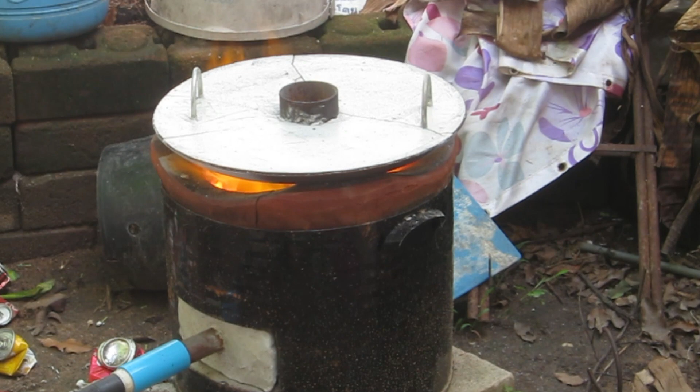Back to part 7 of my milling machine build.

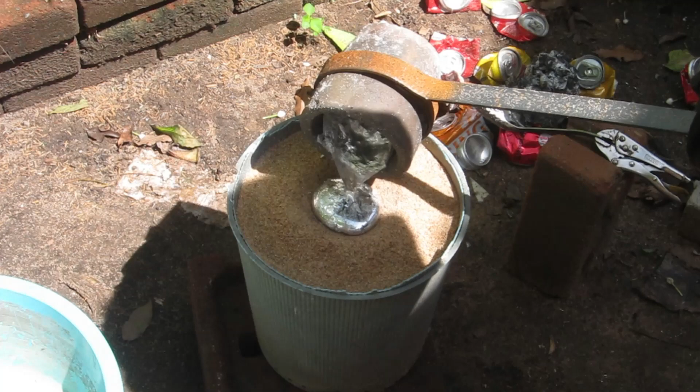Alrighty, so I've just dumped the bucket out into the basin. Now it's had time to cool, so it's kind of the moment of truth. We'll see what I get. Oi, kind of looks alright. Oh, I think we have a winner.

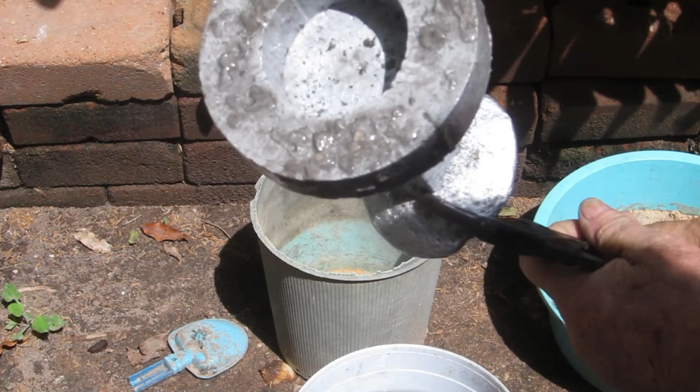Time to cool it down. Still pretty damn hot. Can you see that? I don't think you can see that. We have a winner. You little ripper.

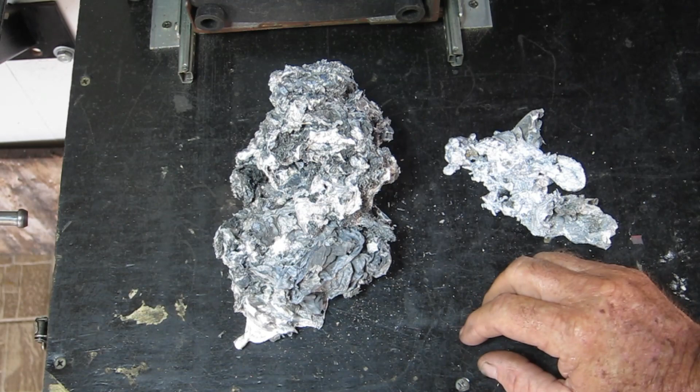Thought I'd show you this stuff. This is the dross, the crap that comes out of metal when you melt it. This, plus a bit more still lying on the ground at the back in little pieces, is what I got from all the aluminium cans and the swarf, and I only got half a crucible worth of metal.

This is what I got from melting the good stuff, plus a bit of that rubbish from this one, and I got a full crucible. Huge difference. So take old Foundryman's word for it and don't use aluminium cans and swarf, because it's just bloody rubbish.

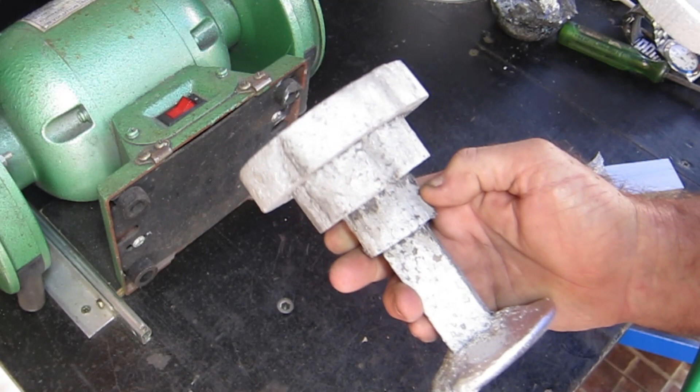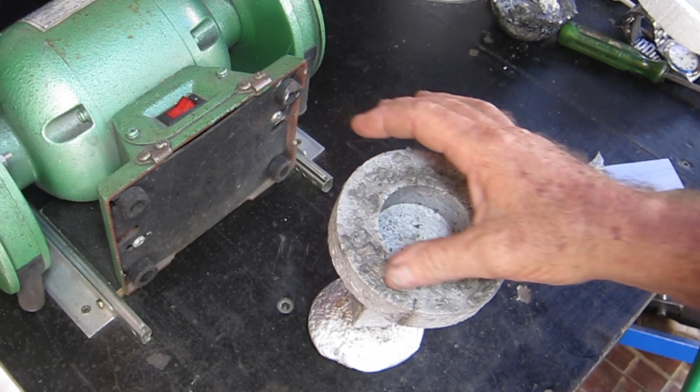Well, there she is, viewers. It's truly astounding how much detail you get in these things. You can see all the little pores and the little beads in the foam and all the rest of it. This stuff on the bottom here had a lot of sort of holes in it, so I went round and I filled it up with some hot glue. So that seems to have worked.

I've got another idea. Some of that pre-mixed polyfiller stuff I think would burn away, so next time I think I'll buy a pack of that and fill it, give it a light sanding, which should get rid of all that rubbish.

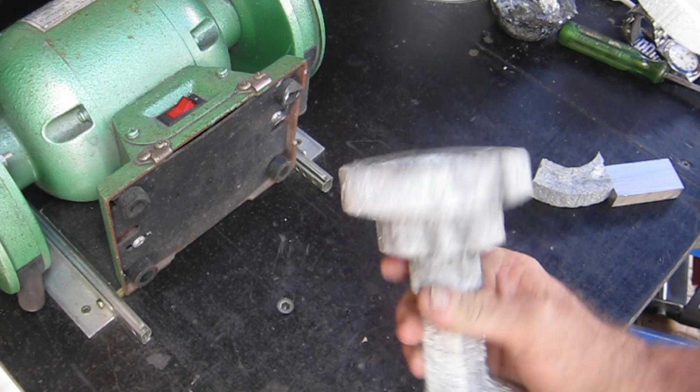This is a piece of the first one, and it didn't like being cut by the saw. You can see the stuff on here, so I don't think it would have machined very well, and I was a bit loath to actually add this into the mix, but most of the material that's gone into this is stuff I've either machined or was cast before, like that slave cylinder from the Triton. Anyway, I'll cut this sprue off, we'll get it in the lathe and machine it up.

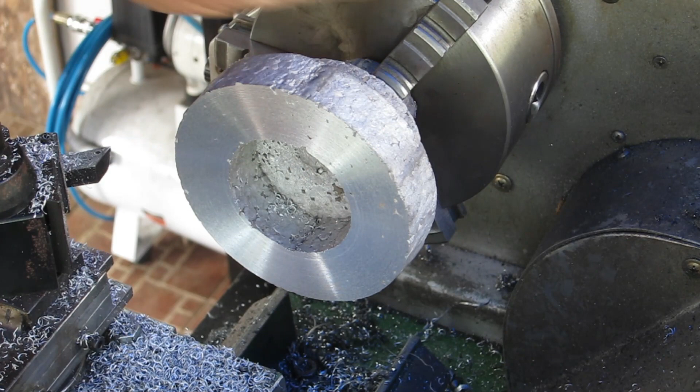Well, I've taken a few skims off the face here, just so that when I turn it around and put it back in, it'll have something fairly flat to sit up against, because it wobbles a fair bit this way. So I'll get that out of there, swap the jaws around, turn it around and machine the front end of it first, and we'll come back to the back end after we're all done there.

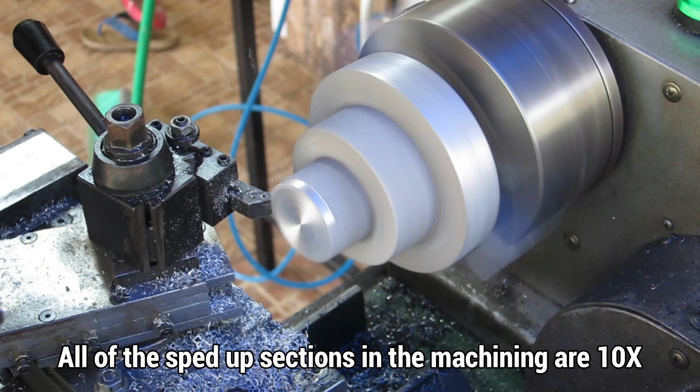Well, as per usual, I have no drawings, no plans, so I'll just be winging it and wandering over to the mill and taking measurements as I go with this. So far this stuff machines pretty well, still got a couple of little inclusions in there, but I might have to machine a whole lot more off that face yet. Well, I've got a long way to go on this, so I'll bring you back later.

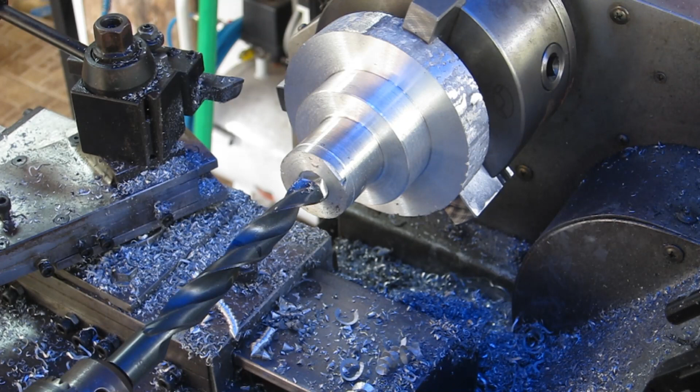Alrighty, so I've machined it up to what I think I want. There's a few inclusions I can't get out of it, I don't want to go any further with it. There's a couple in this face here, but I can't make this any smaller, I'll run out of thickness for some grub screws to clamp it with. So now I'll drill it out, and then I'll have to bore it. This line here has to be parted off when I'm done, but I'll drill it first and then part it off.

I've run out of WD-40. I should have gone down the road and got some, but I'll just use some oil instead.

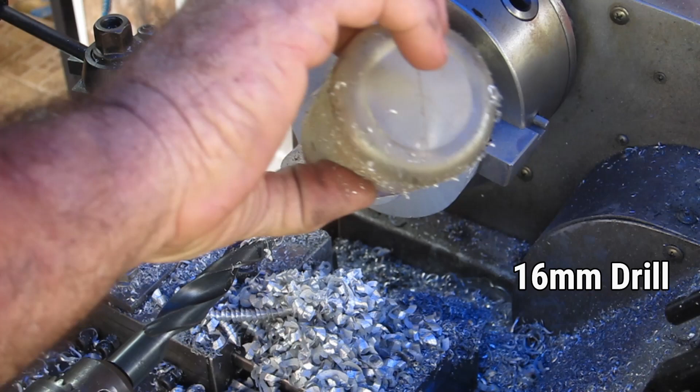Alright, so I need to bore that to 19mm now, but I'll part this bit off the front first. Save myself some boring, I'll only bore down to about here, and then in the back of this I'll use the 19mm drill. It won't matter if it cuts a bit oversized. Alrighty, I'll get on with that. One end up oversized.

That's 18.97, and I don't know that I want to make another pass up there. I might just try and polish that out with a bit of sandpaper.

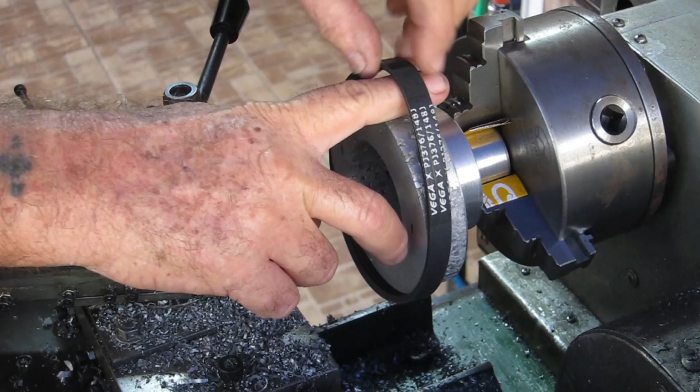Alrighty, so next cab off the rank. I've got to turn the OD of this down to something that's about right, because I think I've underestimated the belt length. It might be a bit short, because if at that point there I'm not going to get a 19mm pulley in there. At the moment that's 105mm. I'm hoping that down around 95. I wanted to do it at 100, but I'm hoping at 95 I'll get enough room for the other belt, the other pulley over the side here.

And I've also got to bore the inside out to just a bit over 75, maybe 78, something like that, so it's got clearance over the top of the bearing housing up on the top of the milling head. So we'll get on with that.

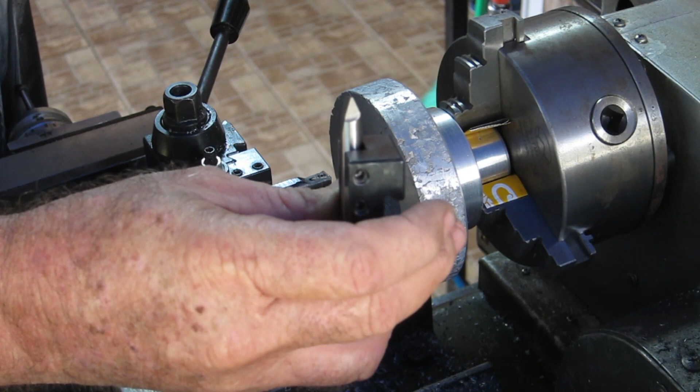Once I've turned that down, I'm going to have to put the grooves in it, and I've ground this tool up. It's a piece of 5/16 round. I found all the dimensions required online to mark this out, so we'll get it all turned down and then I'll mark it out, and we'll attempt to cut some grooves in it with this.

Something else that I didn't mention, I also have to bore up inside this part here, bore that out to about 50mm to allow for that clamping section, the shaft clamp up on the top as well. But all this will take quite a while, I'll bring you back a little later.

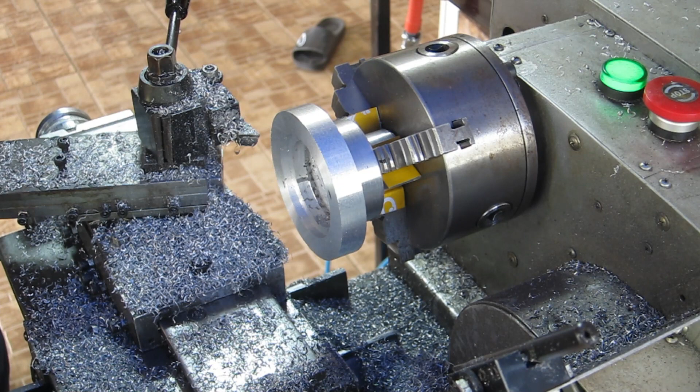Righty, quick progress report. I was boring away in the centre here and I kept thinking, why does it look so deep? And it suddenly occurred to me I had to knock 10mm off the face of this. So I abandoned that. I've come out and I've taken 10mm off the face, and I've reduced this now to 95mm, and this belt length should be perfect now, so looks like I got that right.

Anyway, I'll get on, keep machining this up. I'll get back to you.

Well, that's it for the inside of all of that. I've still got a few inclusions here, but I'm a little worried that this area just here has gotten a little thin. I don't really want to take any more out of it because I don't want to break it off. But there's plenty of meat up here where these inclusions are, and you know, once it's on the mill you won't get to see it anyway.

So that's that for the inside, and it hasn't quite worked out the way I had it in my head. I might end up having to machine a bit off the top there where it just sits over the shaft. But anyway, that doesn't matter, I'll do that later.

So now I've got to mark all the outside up here and machine those grooves in it. But I've got to head into town for a little while, so I'll do that when I get back after lunch.

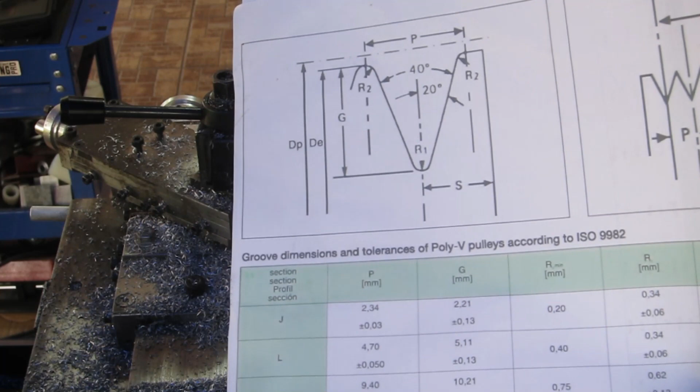Alrighty, so these are the drawings I found online, and the specs are just astounding. This is a type J, so the width of these grooves is only 2.34 millimeters. It's an odd sort of size, and the depth is 2.21, so I don't know whether these equate to an imperial size or not, but they're weird.

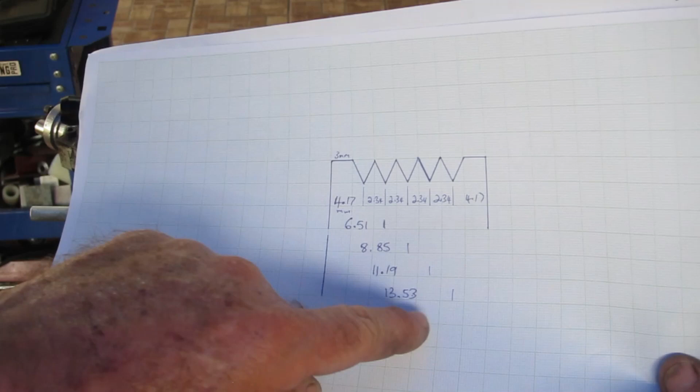Now, there's going to be absolutely nothing scientific about the way I do this, because I have no micrometer dial on my Z-axis. So I've worked out I want to have a 3mm flat out on the edge here. So I've worked out the bottom point of each of the 5 V's and worked out what the measurement will be from the edge in, and I'll just use my digital vernier. I do have a scribe, a proper scriber, but working out these odd numbers would be a nightmare. Much easier to do it with the vernier. So that's what I'm going to do.

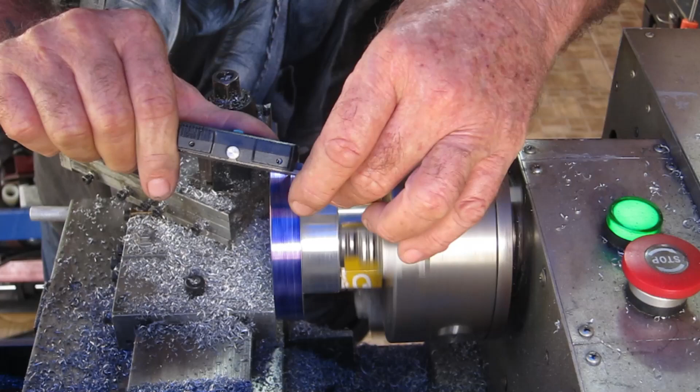Alrighty, so there are my marks. So I'll set the tool up now and we'll see how we go.

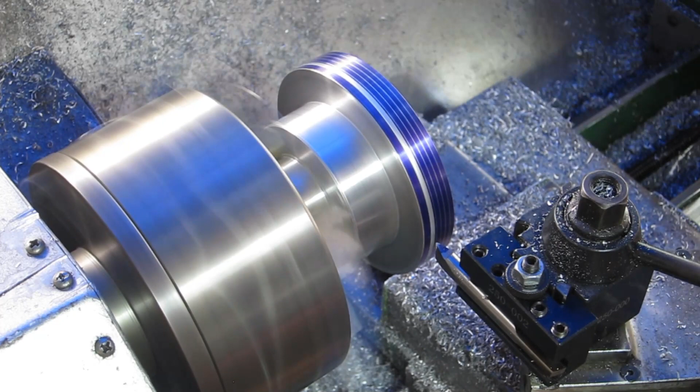See what it looks like. Oh, surprisingly, it looks pretty bloody good.

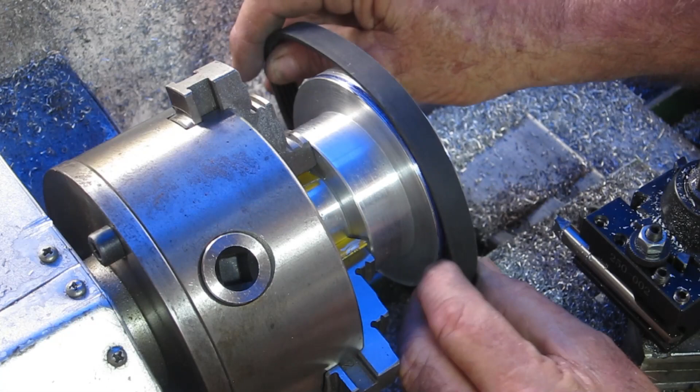Yeah, that'll grip. You beauty. Looks like we might have had a win.

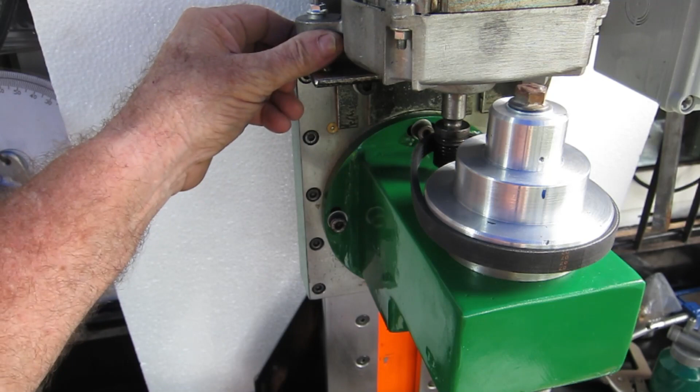Well, I don't really know why I was worried about the belt not being long enough. This is about where I want the motor to lock up, about there, and it's loose as buggery. So I'll have to set up an idler bearing in here. But that's not a bad thing, because it'll make the belt wrap around the pulleys more and make them drive more positively. So that's not a bad thing.

And I can just set that fixed. I don't need to make that adjustable because I have adjustment up in here. So I'll just figure out just where to drill and set that bolt in there, put a bolt through it and just bolt it straight to this.

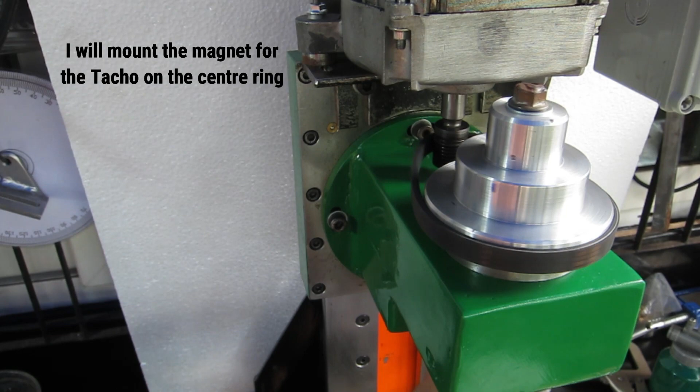And on another note, it really needs about 7mm taken off the top of this, but I put a washer under there, and when I was tightening it up I felt it give a little bit, and all that play I had in here is now gone. So I've managed to pull it out with that.

So when I pull all this off again, I'll get in there and nip that little clamp ring right up tight and know that it's pretty much where it needs to be. And I don't need those 2 adjusting screws on top, because I can use that to adjust it up.

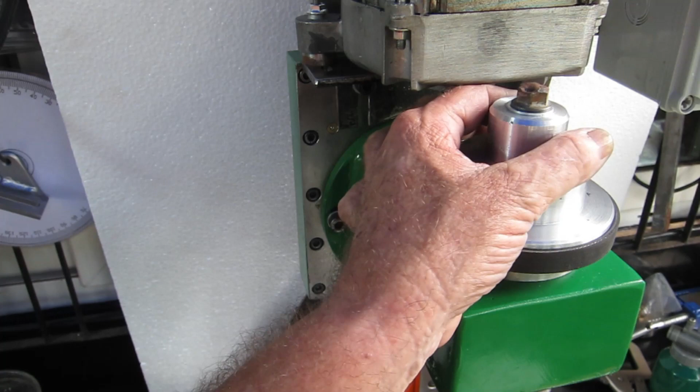And you'll see 3 centre punch marks here. I'm going to drill that and put 3 grub screws in around here, so that'll lock that onto the shaft nice and tight. So when I lock this down, hopefully this won't have any effect on the bearings. So winner winner, chicken dinner.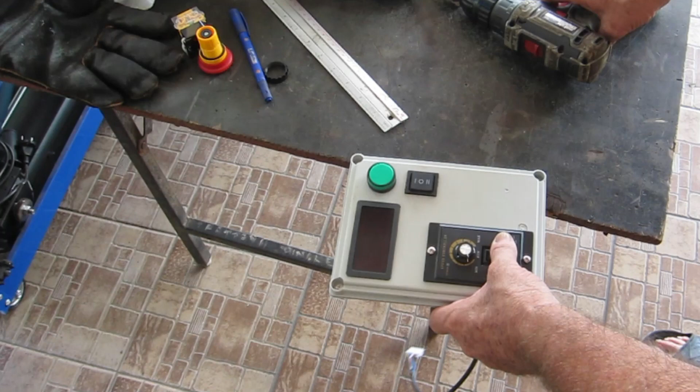Alrighty, so while you guys weren't looking, I went out and I bought some electrical cabinet here, and I've been gathering everything to do this for a while, and it's time to get it all fitted up.

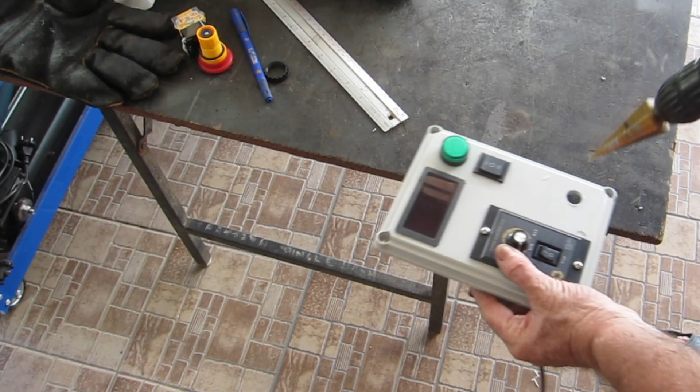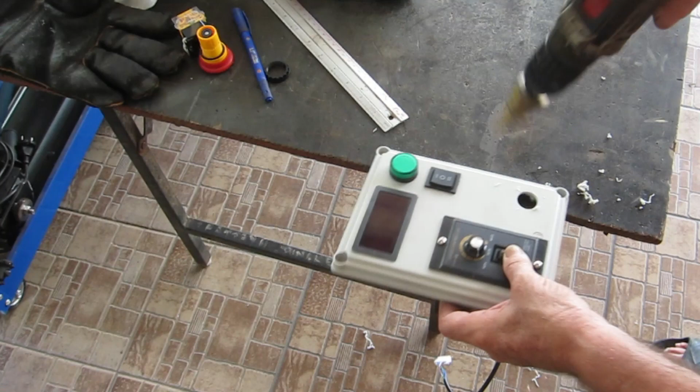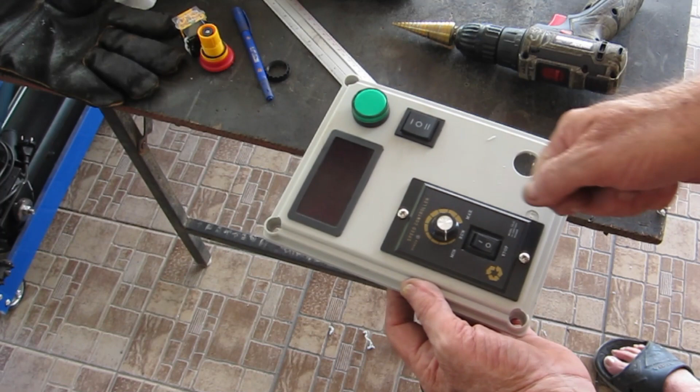You know, these things are brilliant, they have no trouble chewing through plastic. This was a weird one here. When I was cutting these out, I just drilled some holes and used the jigsaw. The jigsaw was melting it, so as I was cutting it, it was re-gluing itself back together. What a pain in the ass. Anyway, I'll get this one fitted up in here. Wait, next one up.

That's going to fit in there. Beautiful. I think I'll get the crap cleaned off the back. Anyway, I'll get myself all set up and then I'll come back.

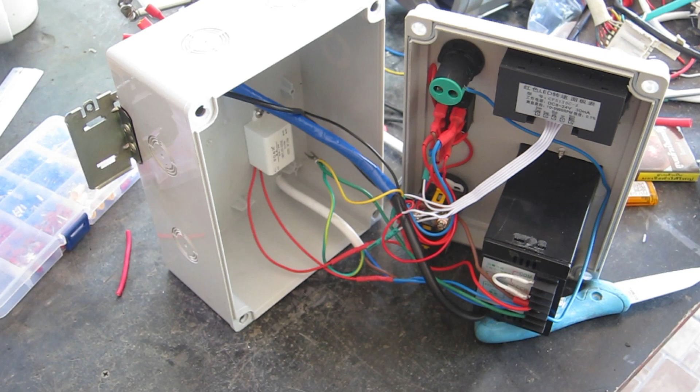Well viewers, I had every intention of videoing a lot of this, but glad I didn't, because it's now 3 in the afternoon, and I started this at 11 o'clock this morning, so that's 4 hours it's taken me to wire this up. Bloody nightmare really. But anyway, what we've got in there is this little unit - it's just a transformer, from 220 AC to 24 volt DC. I did have some 12 volt ones, but I can't find them. This black wire here is the lead coming in from the tachometer, that's it there, and it will run on anything from about 8 volts up till 24 volts.

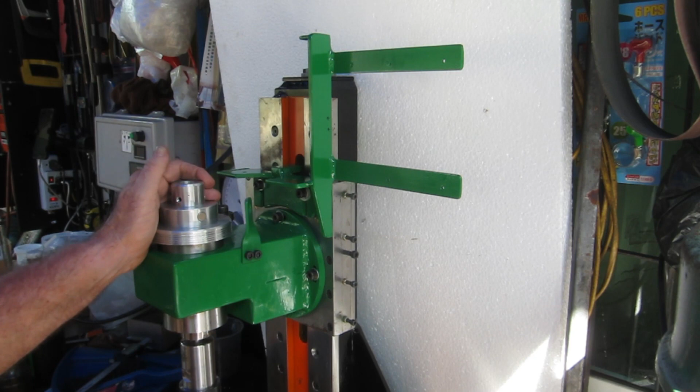Right, so also while you weren't looking, I've drilled and tapped this, put these grub screws in here. I've also machined a little recess to embed the magnet for the tacho. Made this bracket for the tacho and fitted that. I've welded 2 more brackets onto here, and that's where the electrical box will go up in there. And I've added this little tab on here because I haven't got around to doing it yet, but I desperately need to make some counterweights for this, because trying to lift it is just unbelievable. Well, it goes up there okay like that, but by the time I add the motor and everything else onto it, it gets really heavy and hard to wind. So I need to put that up there. But anyway, I'll fetch that box over here and we'll fit it up.

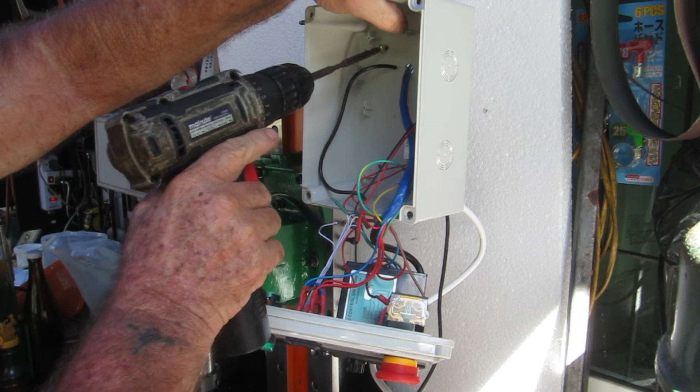Damn thing, when it starts hammering, it undoes itself. It falls out all the time. Bloody nuisance. There's that longer screw I just got. Magnetic, everything's got scraps sticking all over it. Where's my earth lead? There it is. One more screw. All right.

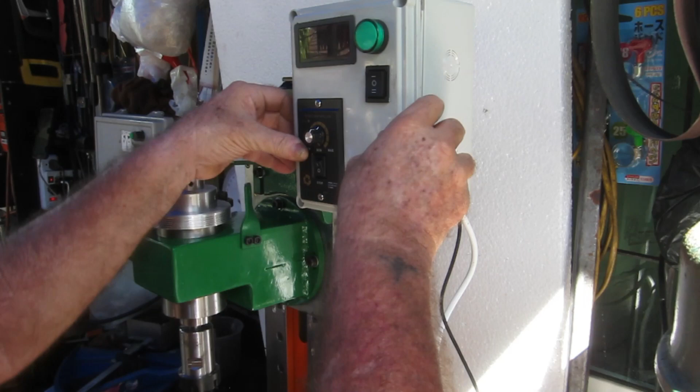Pretty neat fit in there, all of this stuff. So I did try it over on the bench to make sure it was all going to fit. Some bits that need to get the hell out of the way to make it all fit. Right, there it is.

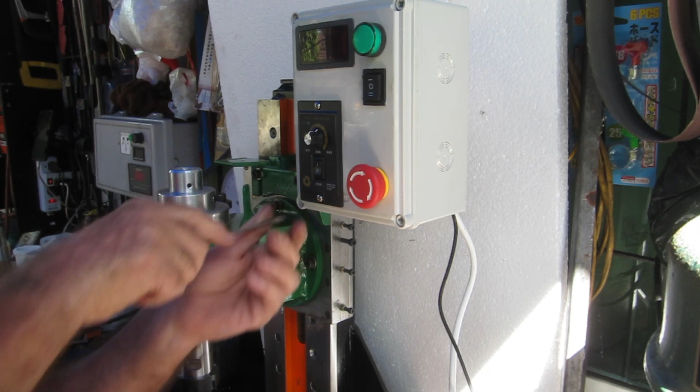Viewers, I'll stop videoing for a moment and fit all the motor up and everything. I've got to get over the back here and hook up all of the wires, pulled back inside to the motor. So I'll pull that off, get those wires back out. I'll come back to you after I get the motor fitted up.

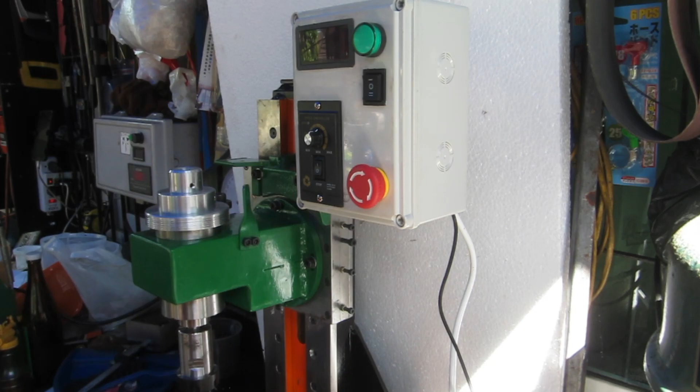Well, there it is, all fitted up, folks.

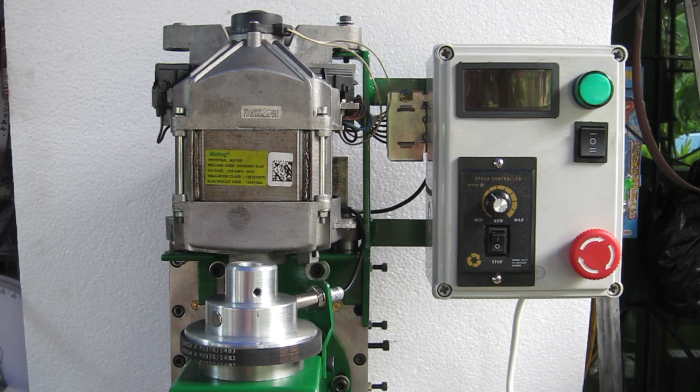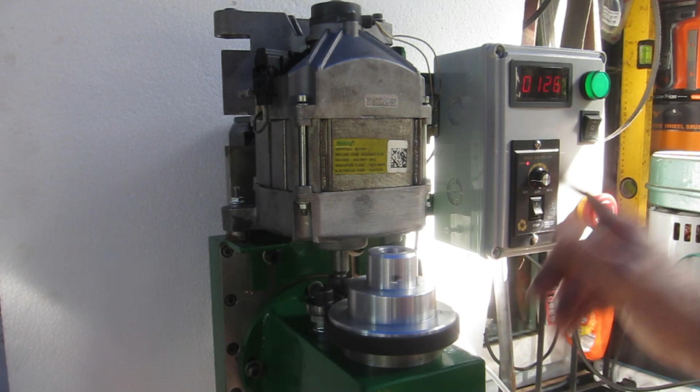And I'll get on with the rest of this now. Well, there we have it, viewers. Ticking away magnificently. There is some adjustment in the side of this. We're going to adjust the top end and the bottom end. This switch is a bit off at the moment. I'll have to play around with the wiring on that. But flat out it's a bit over 2,000, but like I said, that can be adjusted.

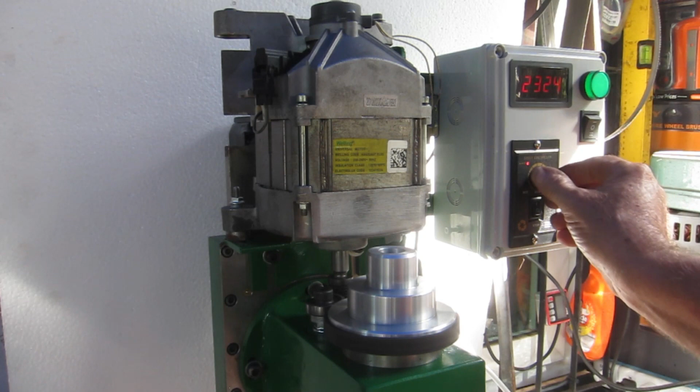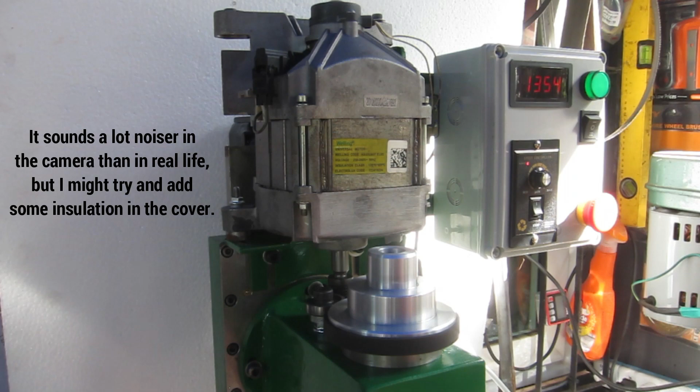Bottom bearings get a little warm. I was hoping to get a cover made for here today too, but I might get that made tomorrow. Anyway, I'm pretty happy I've gotten this far with it this week.